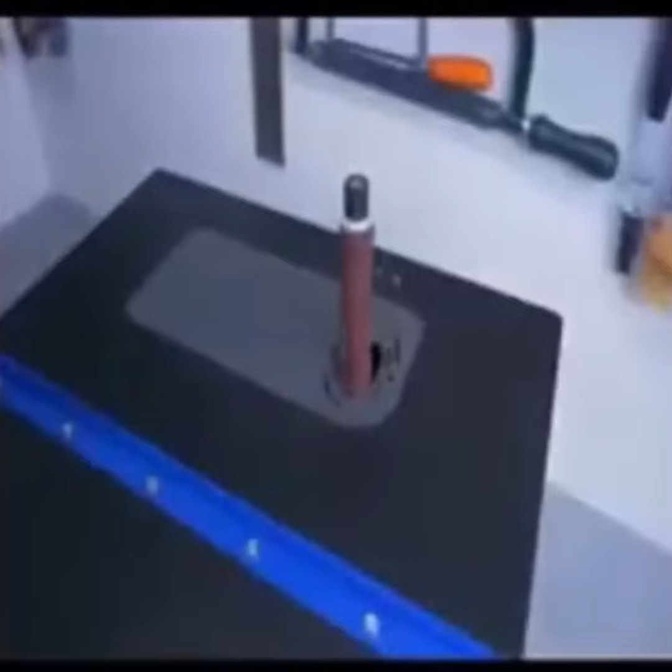And you will never imagine the mechanism going on inside. Let me show you what it can do. Obviously, it's oscillating and can take different sized drums and the belt for sanding inner and outer contours. But what's always been bugging me with these machines is the drums and belts are this tall and most workpieces are not, resulting in only using the lower part of the sanding grit.

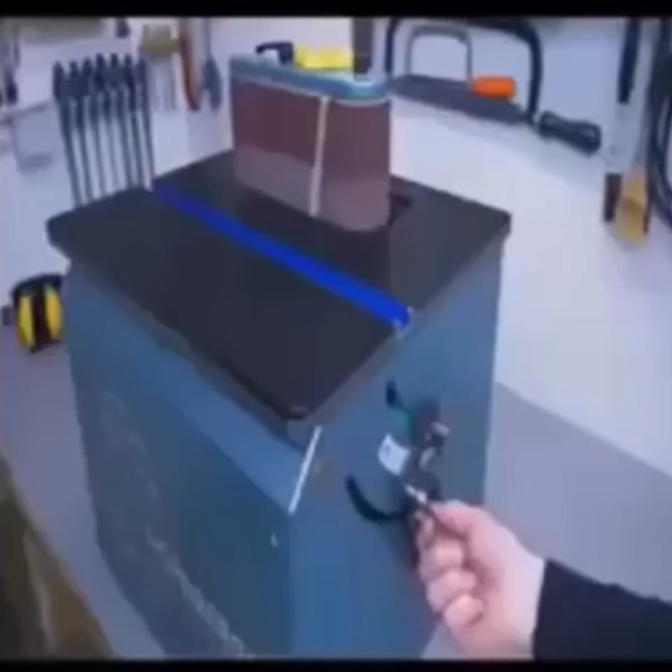Sure, the drums, I can just flip around, but the belt is directional. Flipping it around, you could catch the seam and rip it apart. So a key feature of my sander is a height preset. I can lower the whole mechanism down and use the upper part of the belt. Isn't that fantastic? It also works super smooth. Changing belts is done easily by flipping a lever, and the whole belt attachment comes off with this lever.

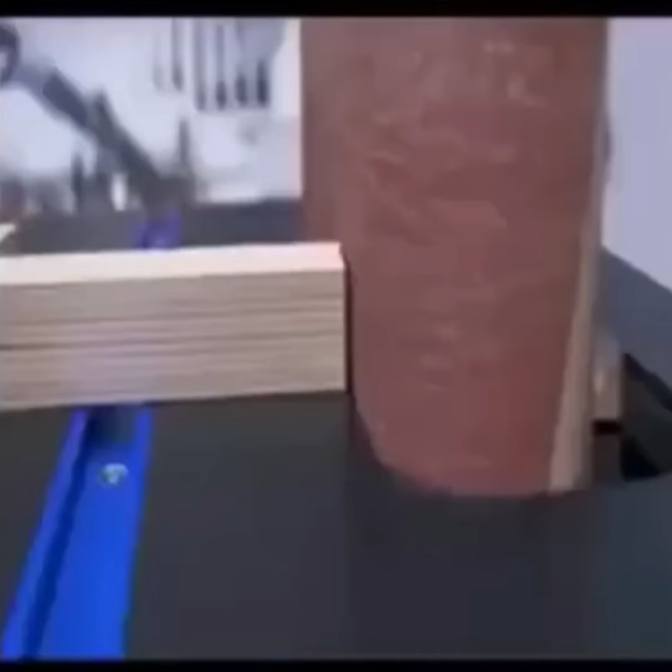Sweet! One feature I decided against is a tilting table. That's just inconvenient. On my machine, the belt tilts. Much more useful. It's effortless with this lever and clamped with a single knob. There's nothing on the other side, everything done from here, but it gets clamped on both sides. I'll show you later how that works. And the big dust collection part is out of the way in the back. That's everything from the outside.

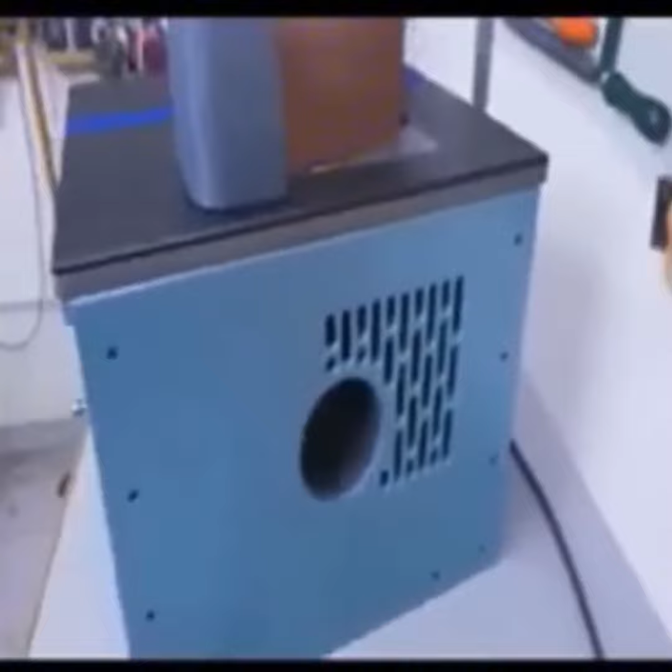You will never believe how I made the oscillation mechanism inside. But first, let me tell you the stupid reason why I built this machine. Not because of the mechanism. A few years ago, I bought this sander with way too many sanding belts now sitting in storage. And I just wanted a better use for them. Really stupid, but that's the truth.

Now, how do you approach such a project from scratch? Where to start? Well, I'll try to summarize. I wrote down a list of requirements with features I wanted the machine to have, like the tilting belt, the height preset, and so on. Then when designing at the computer, I put each feature into its own assembly. So this does the oscillation, this does the tilting, you get the idea. And wherever possible, I try to integrate multiple features into a single assembly.

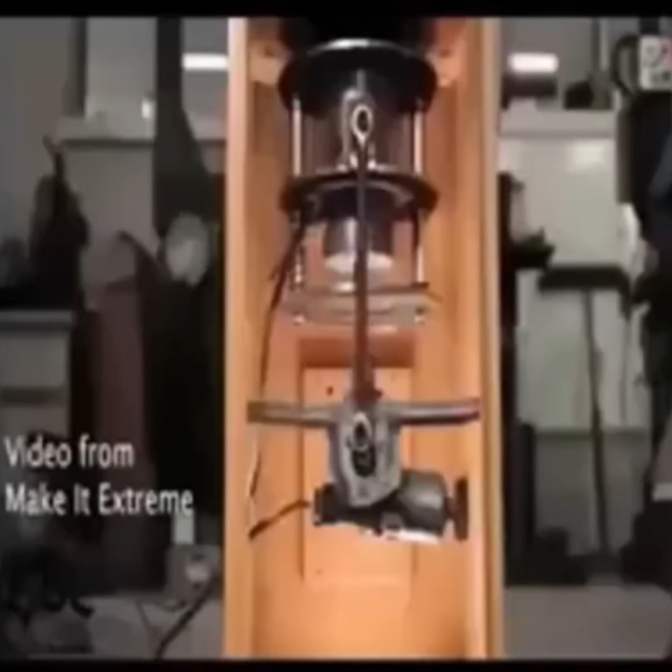Sounds straightforward, but all that was the hardest part. I spent a lot of time designing. But then you can build assembly after assembly and bring them together. So let's get back in time when this didn't exist and begin with the oscillation mechanism. I've got this precision ground shaft which needs to move up and down together with the sanding drum. A common solution is a geared motor with a crank, but to me that's kind of boring.

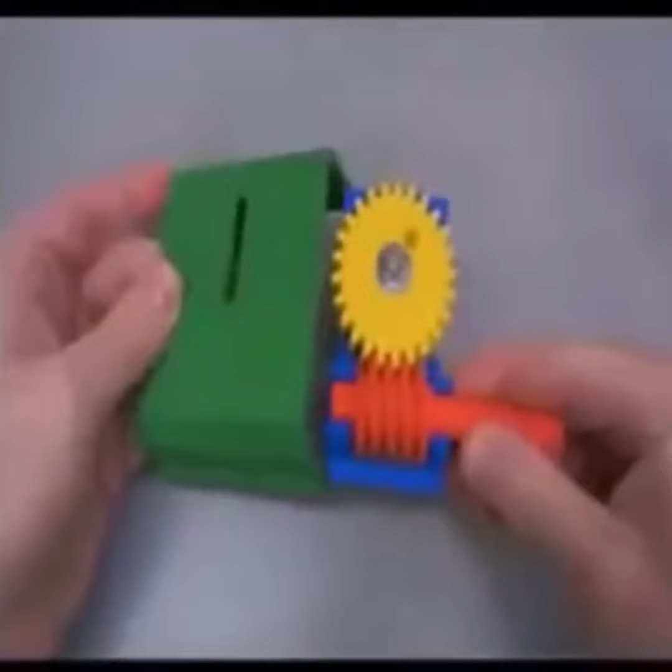I wanted to couple the mechanism mechanically to the spinning shaft with a gear reduction. That should be interesting. From my machine specs, I need a gear reduction of 25:1, and I could do that with a worm gear drive. Every turn, the worm advances the gear by 1 tooth. It has 25 teeth, and I've got the right gear reduction. And then I can slide this into this housing, add a crank pin here, and there's the complete oscillation concept.

It's a great concept with few parts, but 3D printed like this, it can't survive long term. This has to be metal and constantly lubricated, so I would need to find just the right one off the shelf or have it custom manufactured. That's not gonna happen. So another mechanism with a high gear reduction is a cycloidal drive. And if you ask yourself what that is, take a look at my logo. That's a cycloidal drive. Conceptually, it's simple.

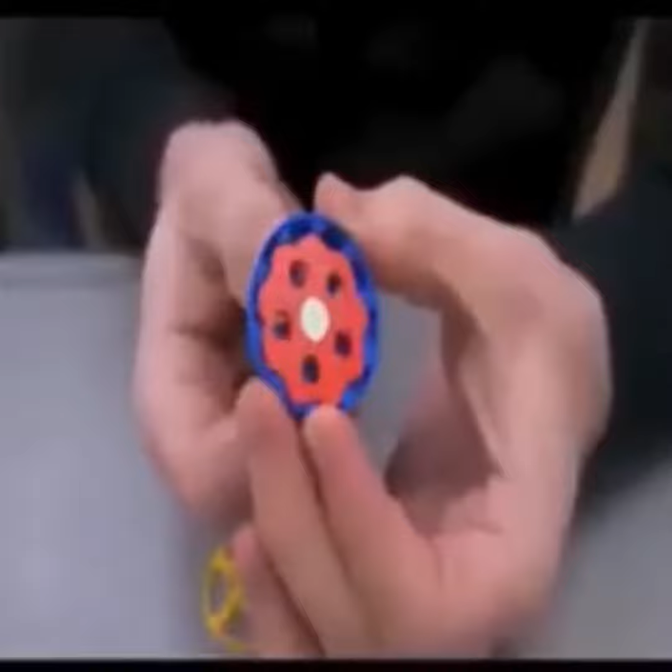We have a housing with pins, the shaft with an eccentric cam, the cycloidal disc, and an output ring. The shaft goes in the housing with the cycloidal disc on top and when I spin it, it does this kind of motion. The output ring fits on top and turns that wobbly motion again into a smooth rotation. The gear reduction is the amount of teeth of the cycloidal disc, so in this case 9:1. This concept I'm sure I can make reliably lasting with simple off-the-shelf parts and 3D prints.

And so now we've got a fast spinning shaft and a slow spinning gearbox, but no oscillation yet. On this concept, the output gear is oriented 90 degrees to the main shaft, making the crank possible. And I still need that for this one. Bevel gears, for example, could do that.

But again, I don't see them lasting a long time. So what else could create oscillating motion? Let's start simple with this ramp shape. If I move this back and forth, you can see the intersection here is moving up and down. And I could pick that up with a bearing.

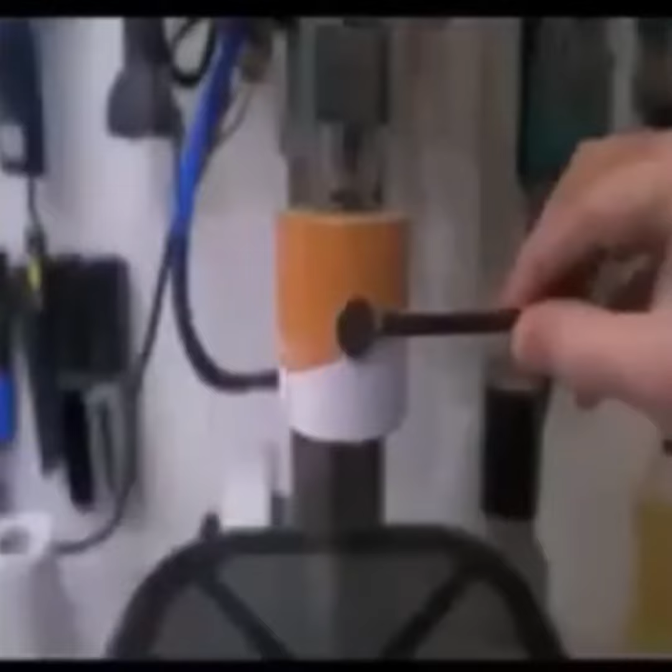Now let's mirror that ramp, and the result is one up and down motion without changing directions, or rather, one full oscillation. But how is this helpful? Well, when I wrap it around a cylinder and make it spin, I now get continuous oscillation. And what actually matters, this cylinder is the same orientation as my gearbox output and a single part. No need for bevel gears. So I think we have quite an elegant solution here and can get serious making the real version.

Getting serious means a lot of 3D CAD work. I modeled the entire assembly with every component before I ordered parts or started printing. But here we go. There are many printed parts, a few bearings, pins and screws, and machine parts, which I need right now, so I cut off pieces from some tubing. The longer bushing goes on first, with a washer and screw as an end stop that I have to play with, of course. Let's put that aside for now.

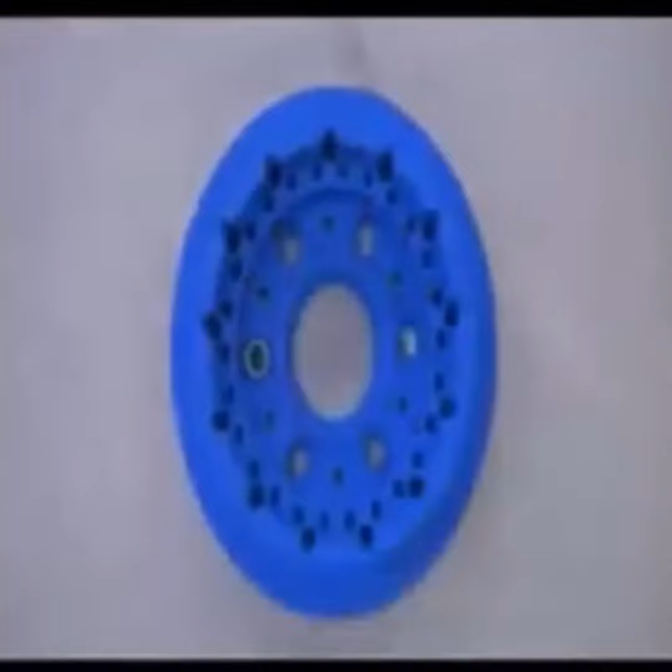Now the gearbox housing. The pins this uses are actual steel pins that fit in these holes that I still need to ream. The automatic compressed air comes in real handy here, removing the chips. The underside then gets a bunch of nuts pressed in, as well as a few on the inside. I could have also used the CNC Kitchen melt-in threaded inserts, but what they don't have is a plastic lock ring, and since I'm expecting vibrations, I wanted that.

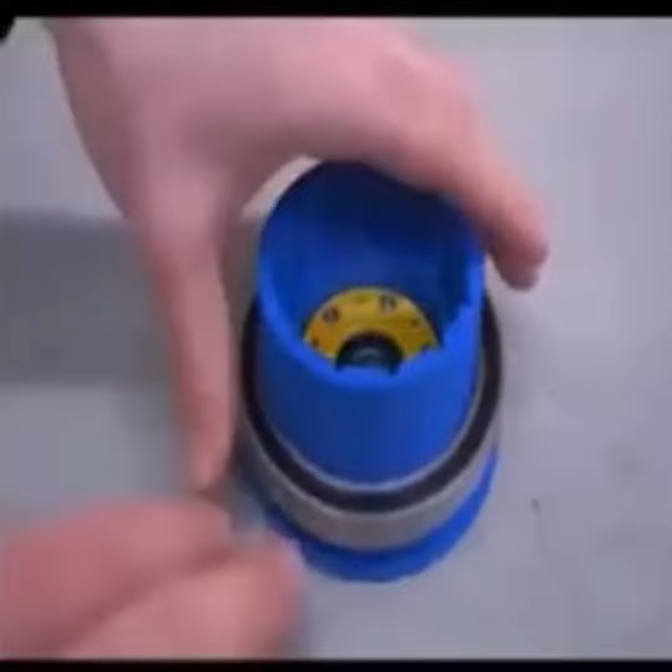This bearing is a light press fit in the center, and this ring goes on top, clamping it down, making this my fixed bearing. The large bearing fits around the housing, where it first slips down easily, and the last little bit is again a light press fit. And then insert all the pins.

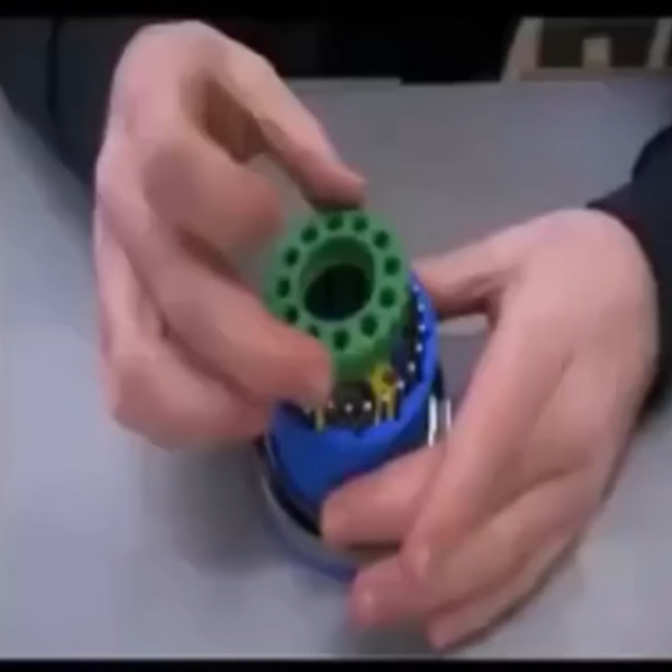Next I need to make sure the cycloidal disc is sized correctly and moves freely in the housing. So when I put it in place, it should just drop down. But it doesn't, and I have to press it down. It does move, but it's pretty tough. I kinda expected this, because I designed and printed this with no air gap, and when that's a real mechanical part, it's basically guaranteed to bind in some way. I need some amount of air gap in here, but just don't know how much exactly, so let's find out.

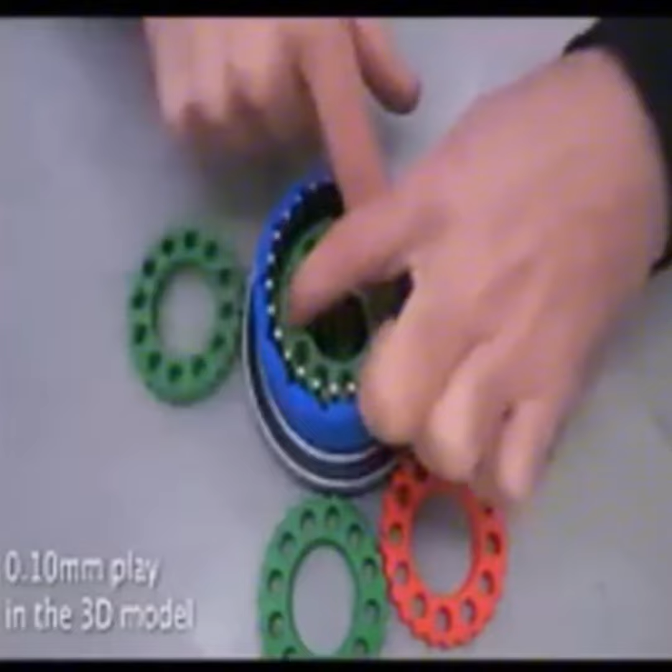I printed 5 discs with increasing play for testing, starting with 0.05. And it already drops down, but the movement is still kind of rough. 0.1. Yeah, that's a bit better, but there's still some places where it feels like it's binding. 0.15. Yeah, now it's getting better. 0.2. Yeah, that's great. And 0.3 is probably no improvement, just more play. Here you can see the play. This is 0.05 and this is 0.3. 0.2 seemed to be the sweet spot.

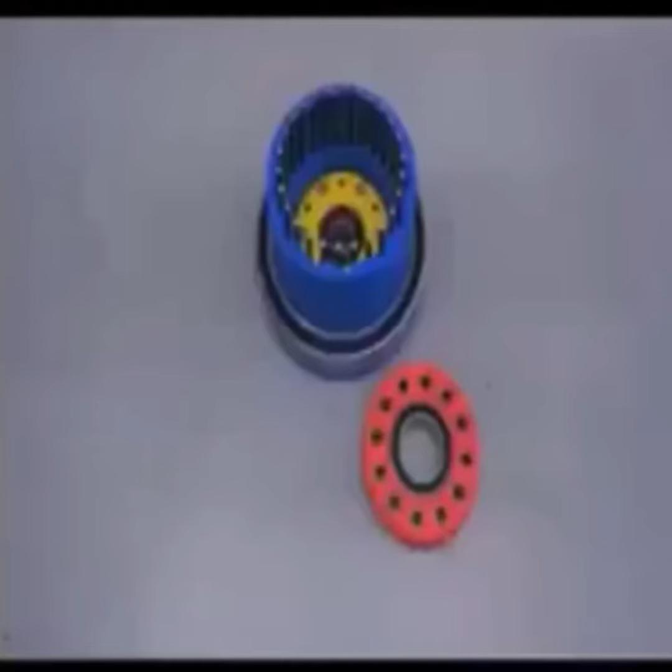Let's go with that. A bearing gets pressed in, followed by steel bushings in all the holes, which came in an interesting packaging. And then a second one. But before the discs came another ring first. It has some holes to ream, nuts to press in, a center bearing, and then the output pins, because this is part of the gearbox output and it sits below the cycloidal discs.

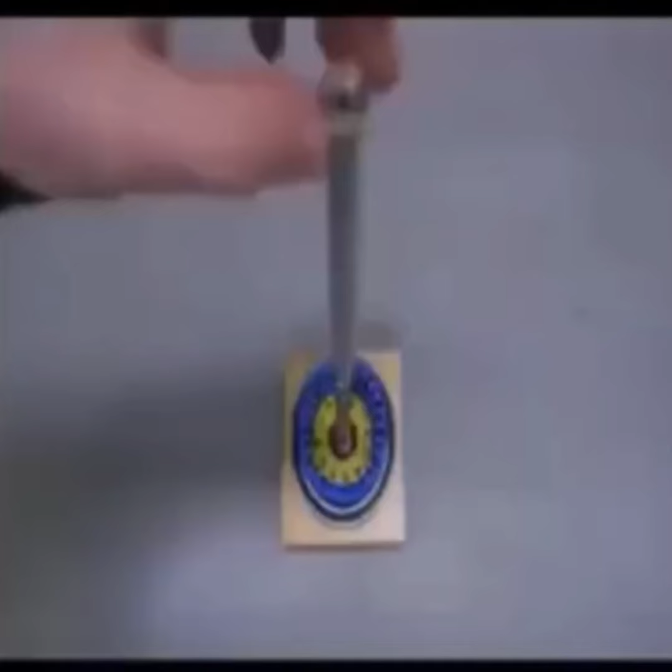Now the parts can come together on the shaft. First the housing, then one of the spacers, and the output ring. Next come the eccentric bushings that create the wobbly motion. Their center hole needs to be reamed as well. They have a feature in them which positions them opposite to each other like so. To fasten them on the shaft, there's a pocket for a little square nut and a tiny set screw.

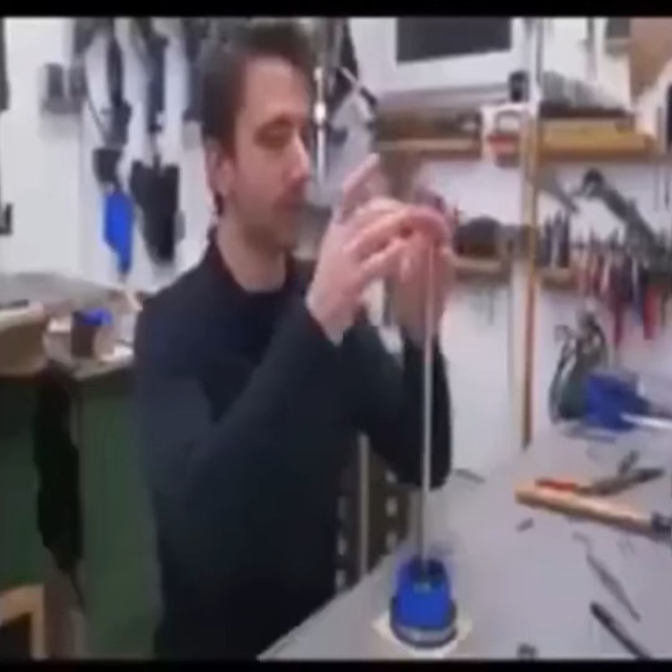And now the disc. Wait. Ah, crap. I forgot to file flats on the shaft. And disassembly is not as straightforward. Yeah, at least I didn't forget to mark where to put the flats now. Since the steel is hardened, I'm using a diamond file and it bites into the material well. But there has to be a more accurate way of doing this.

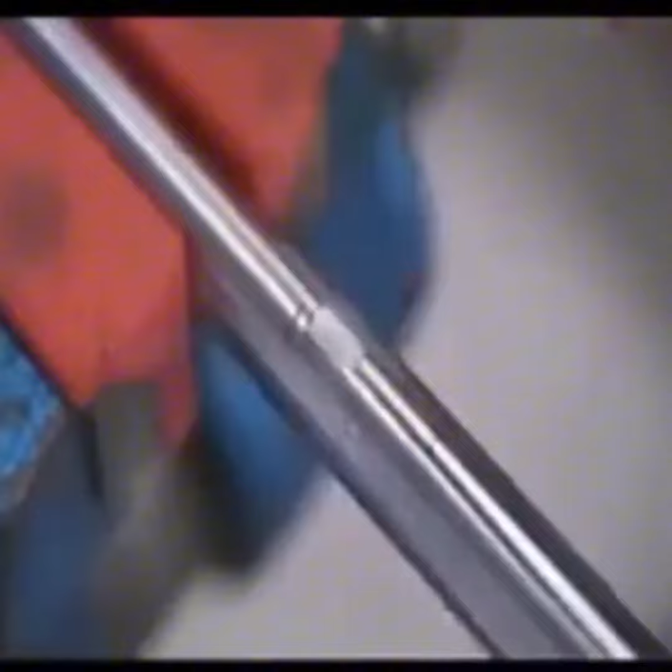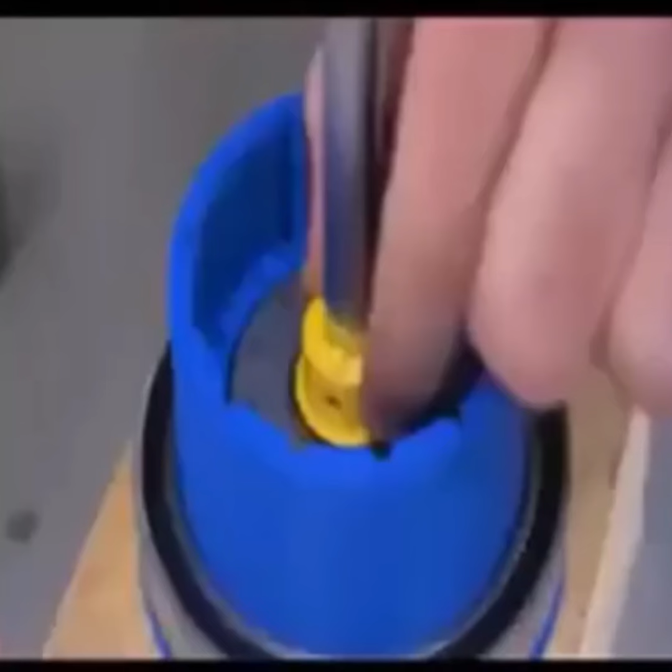I put 2 square blocks at the ends and this piece which holds the file parallel and at the right height. No need worrying about steady hands. But the real benefit is the second side, because I just need to flip the shaft and the second flat will be at a perfect 180 degrees to the first. Simple technique, but great results. The other flats are for later. Now I'm much more confident in the set screw and the cycloidal disc can go on top. I was really keen on testing, so let's do it.

This looks nice. So now the second disc. I need 2 discs because having only one wobbling around would vibrate. So having a second one opposite to the first one, the vibrations will cancel each other out. But I have to make sure the second disc is oriented correctly to the first one in the housing. Otherwise, these output holes won't line up with each other.

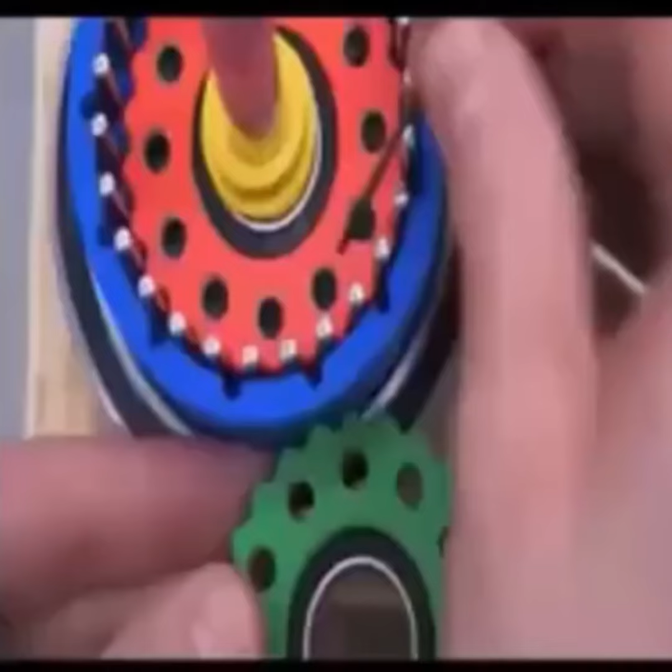Since I have 12 output holes and 25 teeth, this is not symmetrical and there's only one correct position. So I put a little notch at one of the holes to make this simple. Right here. Looking straight down, you can now see how the holes of both discs kind of do a circular motion around where the output pins will be. So let's put them in.

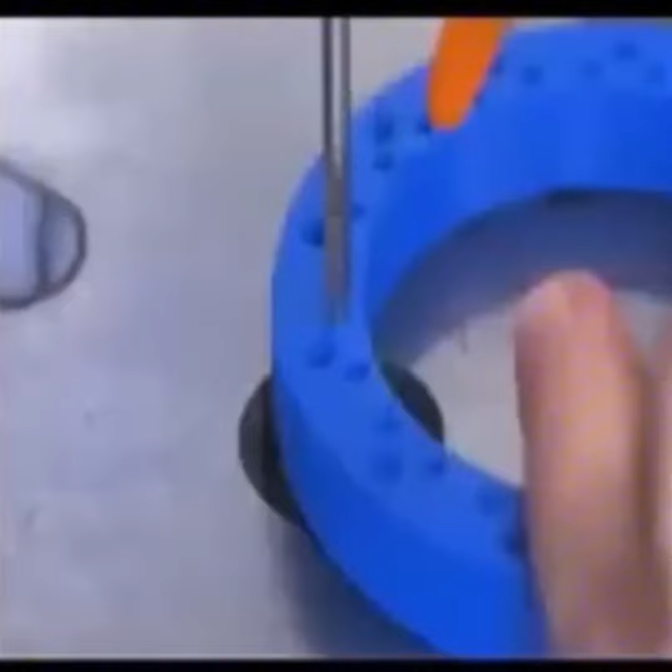That looks promising. The remaining 3 holes are for screws. And after reaming the pinholes in the lid, it goes on. On top now goes the actual gearbox output with matching holes, and on the outside there is the integrated ramp, which I made a lot smoother, and it also fits a bearing. As usual by now, reaming the holes and pressing in a bearing, then the last spacer washer, and then assembling all the parts together.

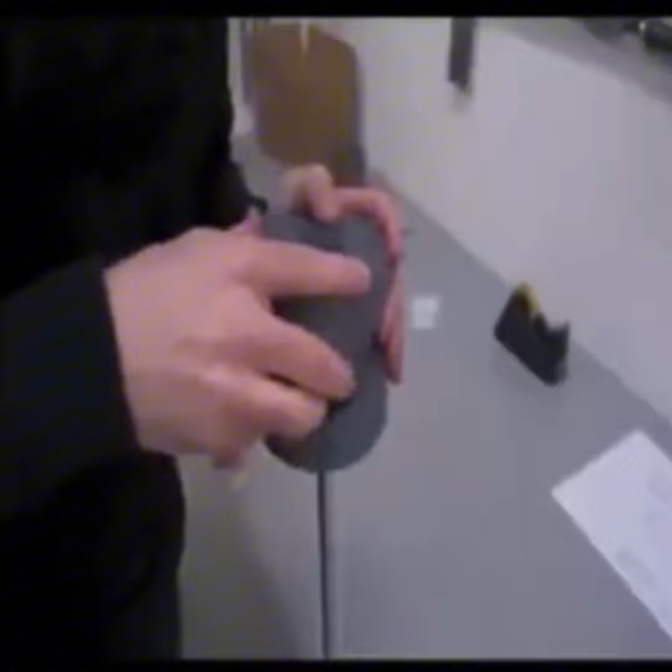The screws hold everything together, but I have to tighten them by feeling, and this is my by feeling face. Without context, this looks really stupid. And finally, a dust cover with an improvised labyrinth seal. Oh yeah, that's the gearbox done. What a nice little compact unit, basically fully enclosed and protected from dust, which is nice. It's super smooth. I can't really feel resistance other than the 6 fresh bearings.

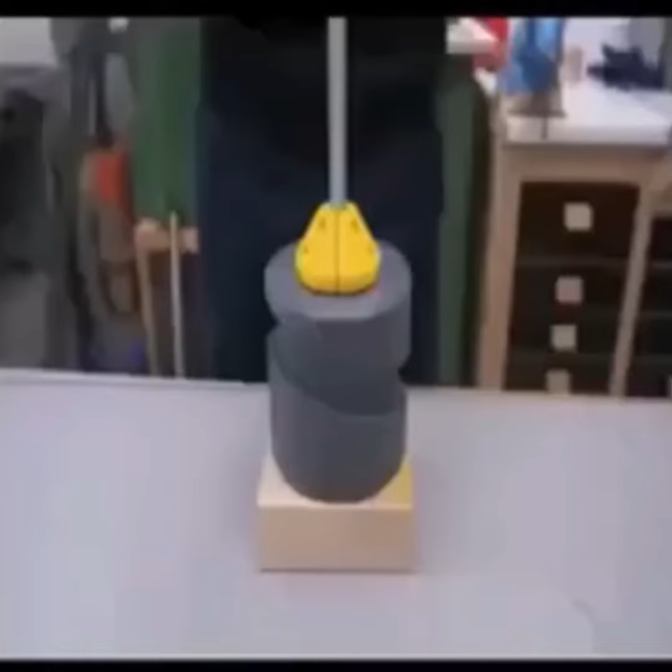And what you might not expect is this is back drivable, which means it works when I spin it here or here. That's cool. Just too bad you can't really see the inside now working. Let's fix that. There you go. I cut it open. Let's see it in action.

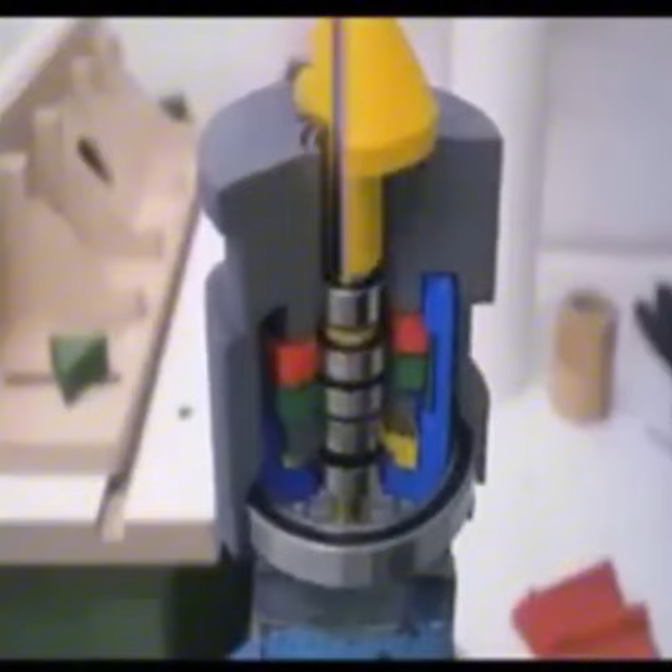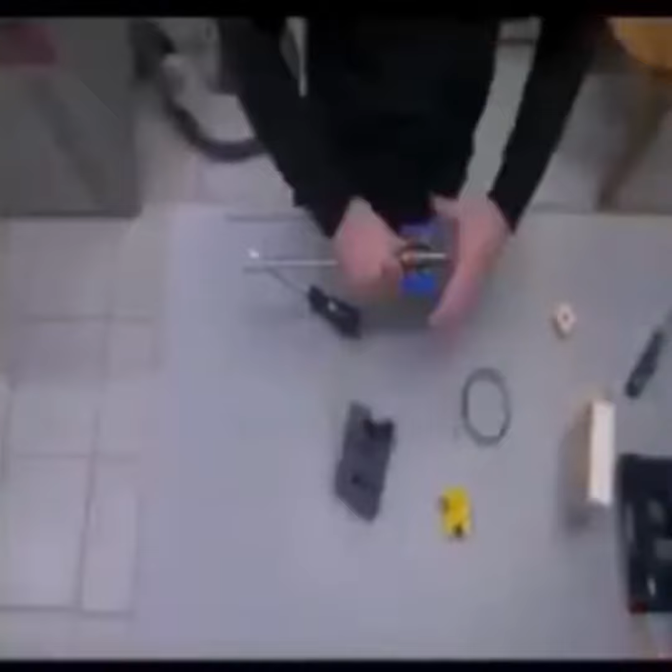So for this short sequence, I had to disassemble everything again, but this then at least allowed me to add grease when reassembling. But still, can this survive long term? Because it will run a lot. Well, I'm confident because all the motion is either done by bearings, metal on metal, or at least well-lubricated plastic on metal contact. And even if that's still not enough, I've got one more trick up my sleeve.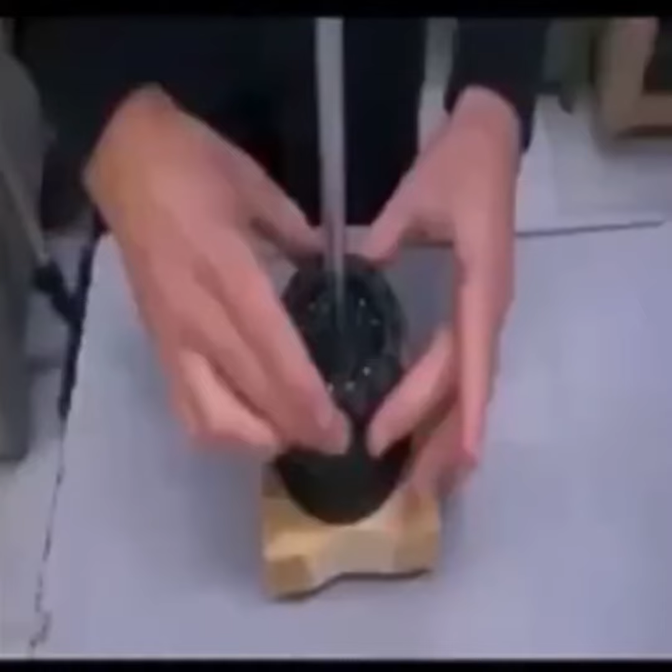But for now, let's disassemble it again, because until the final assembly, I want to stick with my parts, because I of course want to see if they work. The next part that goes on the shaft is the pulley. It's made from the pulley and the pulley support and starts out as this chunk of aluminum.

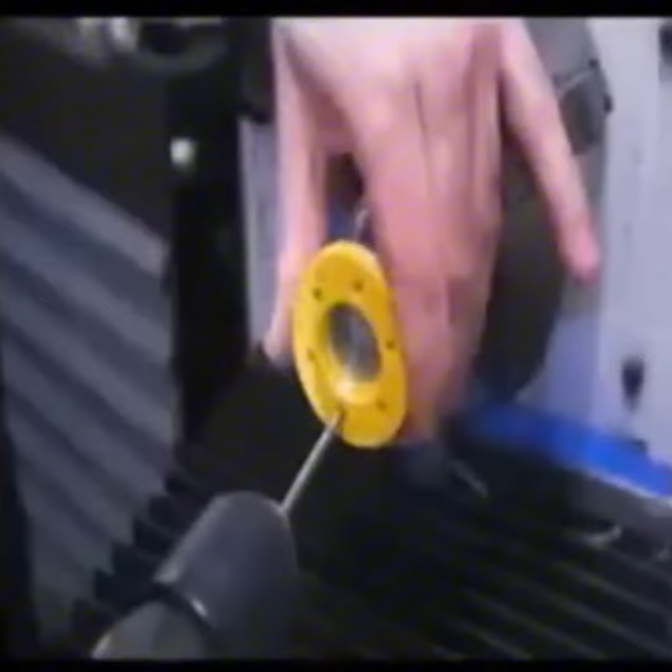This first gets a facing cut and then turned to size with a few roughing and finishing passes and a chamfer. It's a non-critical dimension, but still nice when you hit the 45mm exactly. I used a 3D printed template for transferring the hole locations and then cut the piece off, but forgot to record. It could have looked like this. Except the diameter is too large for my tools, so the last bit is for the hacksaw.

A quick jaw swap to clean up the second face, and then heading to the drill press for the threaded holes. Spot drilling, chamfering, and threading. Standard procedure. For the set screw hole, I installed 2 screws that position the piece correctly in the vise, and with the ruler method, I made sure the part is centered. Then I carefully spot face with an end mill and do the rest. For now, this piece is done.

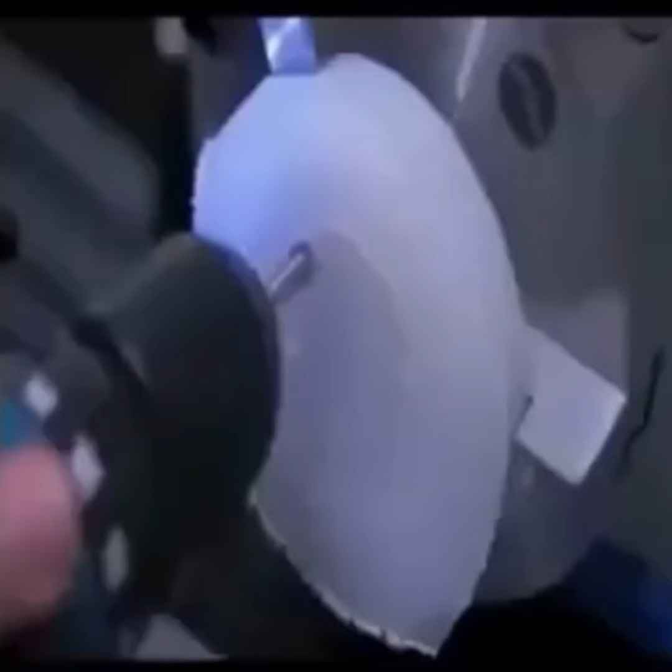The pulley starts as a scrap of polyethylene sheet, which I placed on the CNC router to cut the screw holes and a slightly oversized circle. Cut out, it goes in the chuck where I marked the rough size of a pocket, which I turned to a snug fit with the pulley support, followed by chamfers and removing this material, which creates very fluffy shavings.

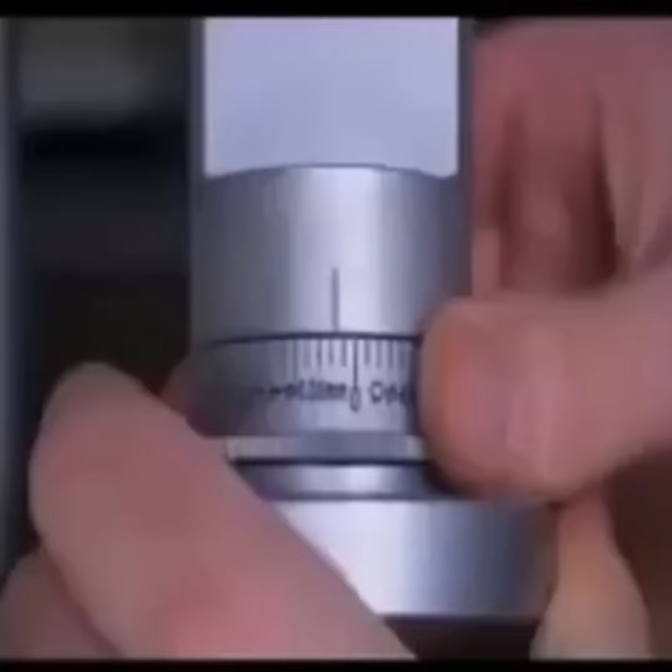Then the pulley support goes back in the chuck where I faced it one more time and then screwed on the pulley with a dab of Loctite on the bolts. I turned the diameter to size and sharpied it black to better see what comes next. Finding the edge with the tool, move it to the center, scratch the surface and zero the dial. Then plunging to a certain depth, creating the V grooves for the belt and breaking the sharp edges.

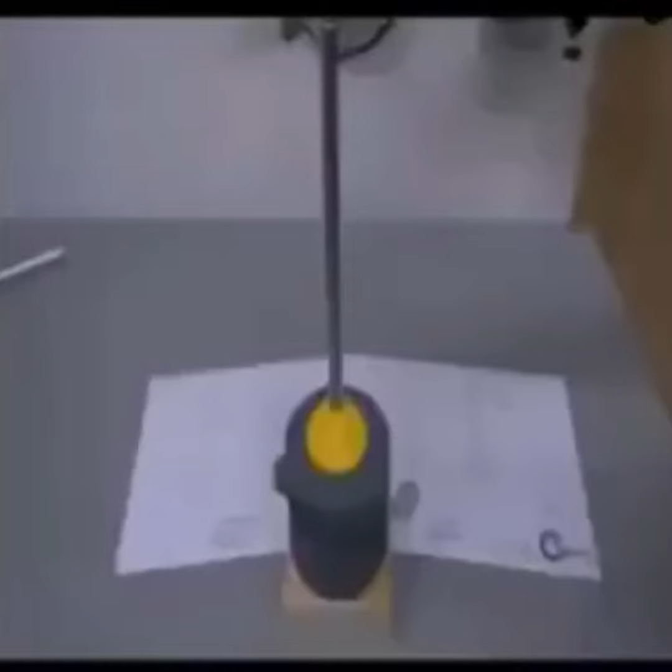The last feature is a precise center hole, which I drilled and then carefully turned to size. It took many passes, but I hit my target and the result is this. Ah, perfect.

Alright, next comes the upper bearing block. The upper bearing sees more of the load when I'm pushing against the sanding drum, so I made the bearing housing from aluminum. Here I marked the side centers, which helped me to position the piece at the correct location on the machine bed. There, I first machined the holes that align with my hole grid, so I can use 2 bolts to hold it down, and then I let the machine go to work. The finishing pass is really satisfying, as well as the chamfer.

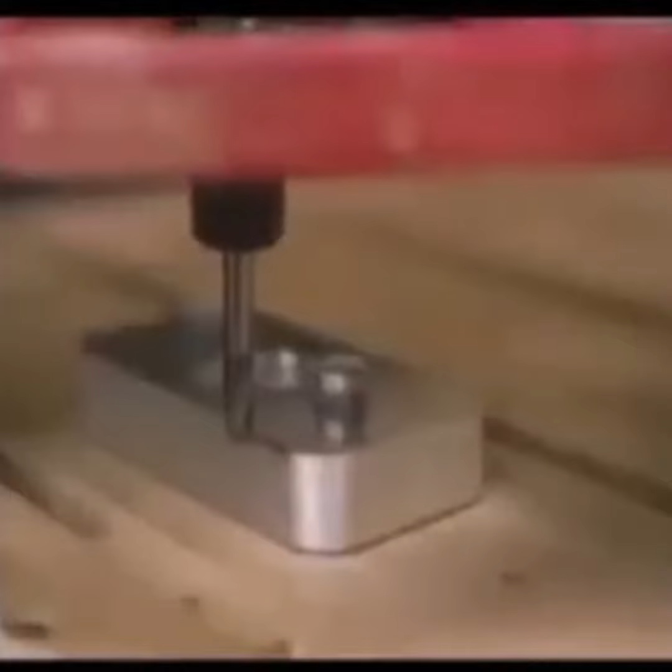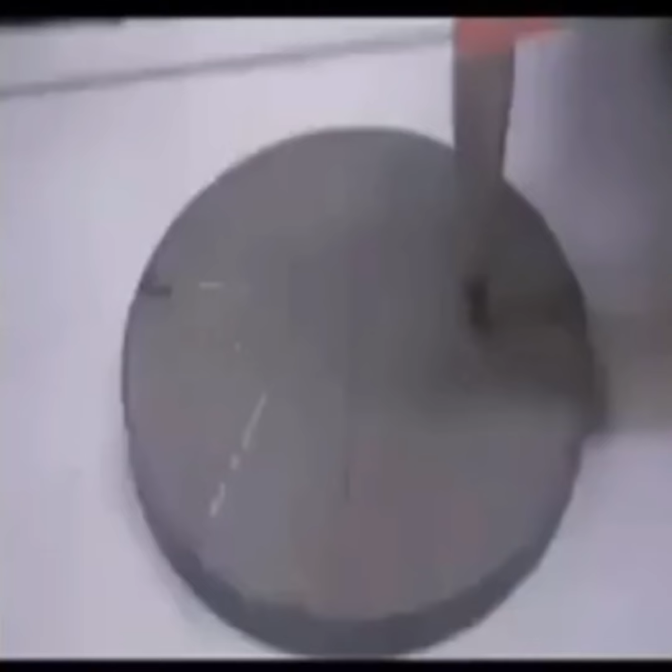Turned out really well, but right now the bearing doesn't fit, because the CNC is not accurate enough for a bearing seat. And I want to turn that, so somehow I need to hold it on the lathe. I've got some round offcuts from a laser that should work. I marked the center and the hole spacing of the 2 hold-down holes, which I then quickly turned into threads. With a magnet on each jaw, the plate has just a little bit of stick out.

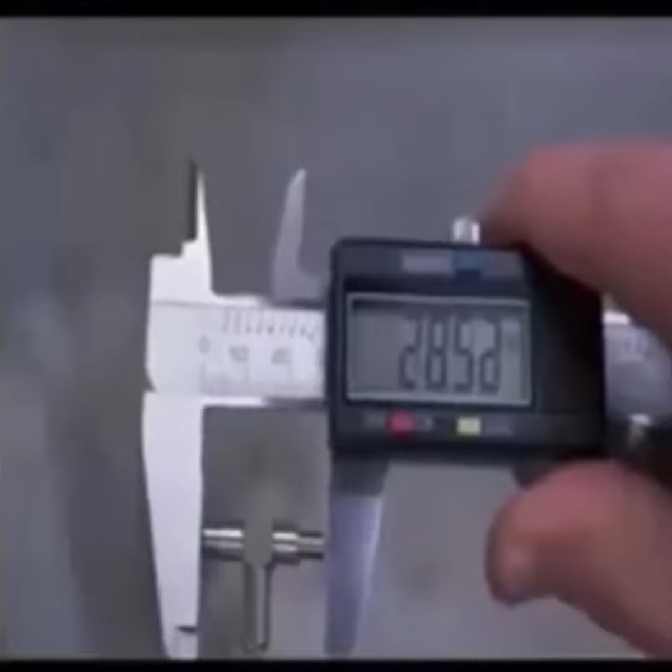I face it by leaving some material at the center, and after about 1mm, I turn it to a nice fit with the aluminum. That puts it in the perfect center and I can hold it again with bolts. I left myself about 1mm of material so I can do multiple passes and get it accurate. And I think that paid off. The result is spot on. Then turning the hole to final depth.

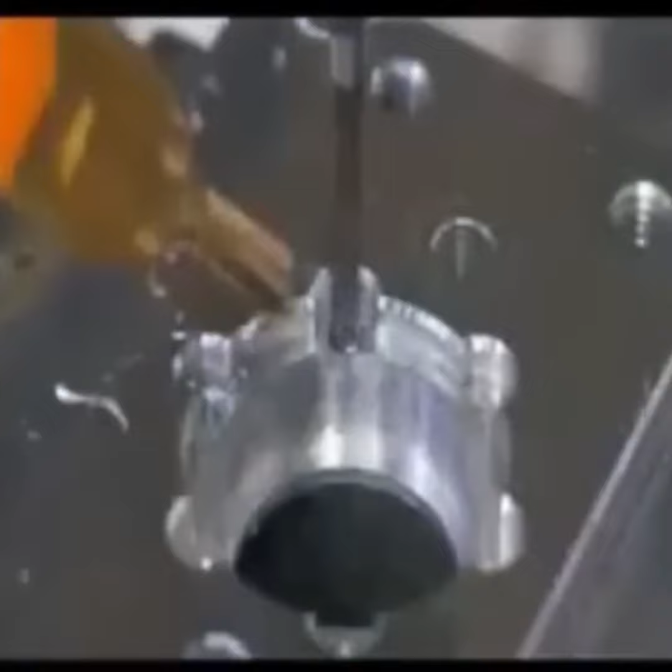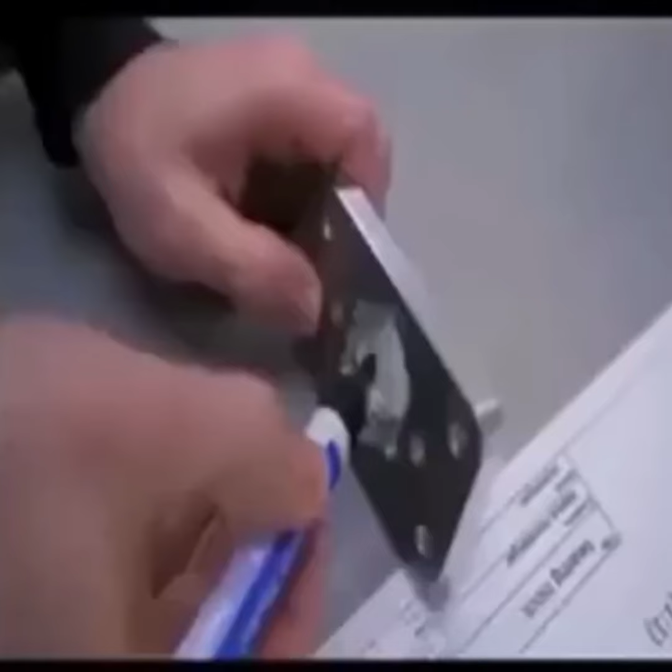At the drill press, I drilled and tapped the outer holes to M6 and the inner holes to M3. But since they are blind holes, I finished the threads with a drill and a low clutch setting. The bearing nose should be a light press fit. And it's not. Oh, fuck. Turns out the bearing is also slightly undersized, which I should have measured before. But at least I can now try out a trick my dad told me. A layer of Sharpie. It's a few microns thick and should solve the problem. Oh yeah. That's a press fit now. Nice. And the 6 screws hold it in place.

The last part that goes on the shaft is the drive block thingy that engages with the sanding drums. It's straightforward and similar to the pulley support. I face and turn some stock to size so it again fits the template, chamfer it and cut it off. This time with recording it. Flipped around, I face it to length and then drilled and turned the hole to the same fit as the pulley.

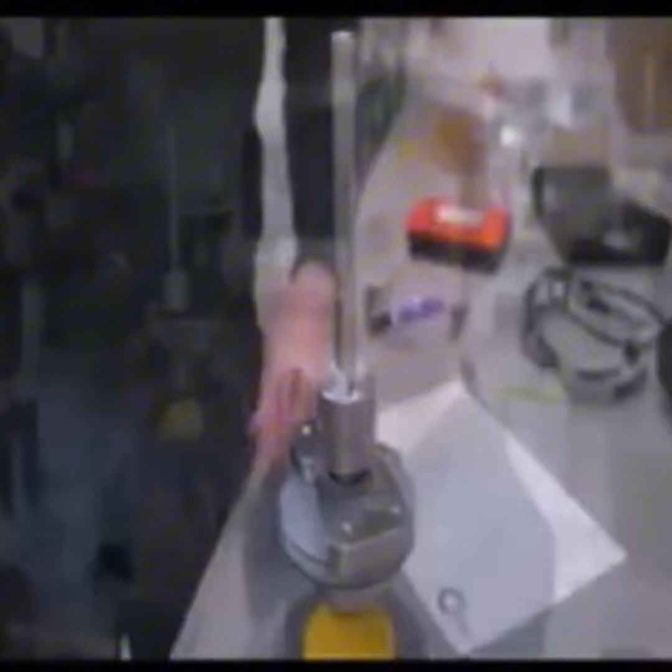Then transferring the hole positions, drill and ream them to size and depth, and hammer in some pins, which will engage with the sanding drums. They also line the part in the vise for the M6 set screw hole. Very nice. Everything is mounted, but it's far from being a finished sander.

This needs to be mounted in something, and I call that the sled. The sled basically is a wooden box where all parts have different features cut into them, and after a bunch of toolpath programming and flattening the CNC bed, I can begin.

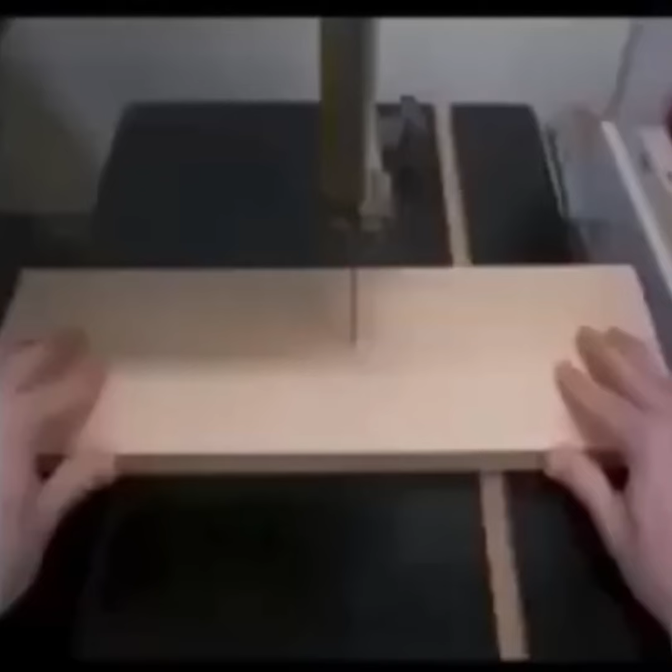The workhorses are these single flute bits in different diameters. They allow me to take aggressive cuts and remove a lot of material. But first I have to prepare my material. Some 18mm thick birch plywood, which I cut into roughly oversized pieces, and then cut a shallow groove all around for my hold-down clamps. This gives me access to the whole surface for machining.

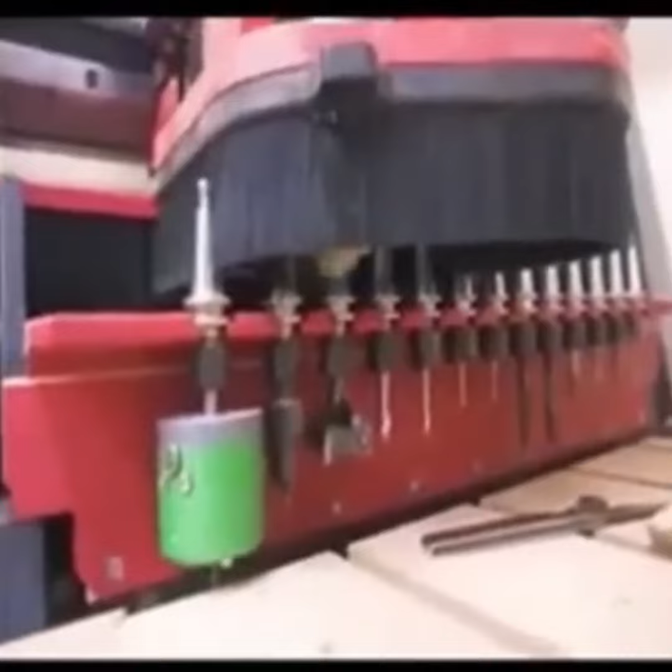But mostly the stock material isn't flat to begin with, so I shim the gaps to not bend it with the clamps. I then cut the various holes and other features into the part, followed by the outer contour to about half the depth. Then I switch to the flattening bit to make the surface flat and also cut away all the burrs from previous operations. And then the program waits for me to switch to screws to finish the outer contour.

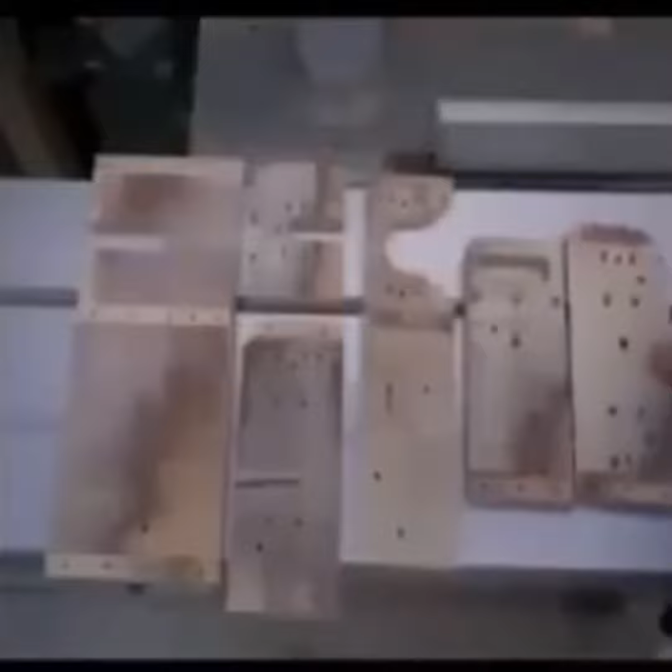And like this, I cut all the parts. Some I also just tapped. And of course, I also had to crash into the shim, destroying this brand new bit. At least I can continue, so I removed all the bigger chunks, flush trimmed the edges, and made new grooves for the second side. I then used pins to precisely position the parts for the second side. That works because I have the same hole layout in Fusion 360, so the software position and the real position match, and I don't even have to probe the parts.

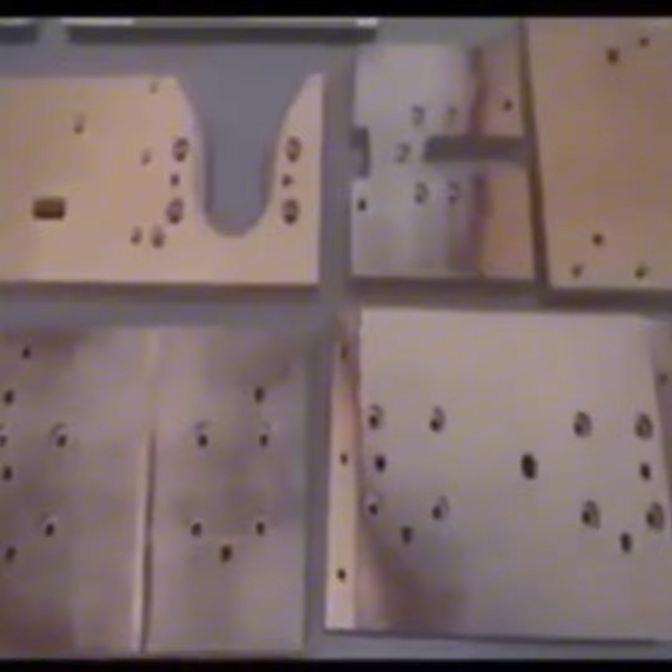Most of the second side operations are holes, chamfers and big chamfers, and flattening to thickness. Basically the same for every part. And there are all of them finished. And none of these parts are sanded, but by using the right techniques and especially order of operations, I get these clean and sharp edges everywhere on both sides. Let's check the fit. Ah, beautiful.

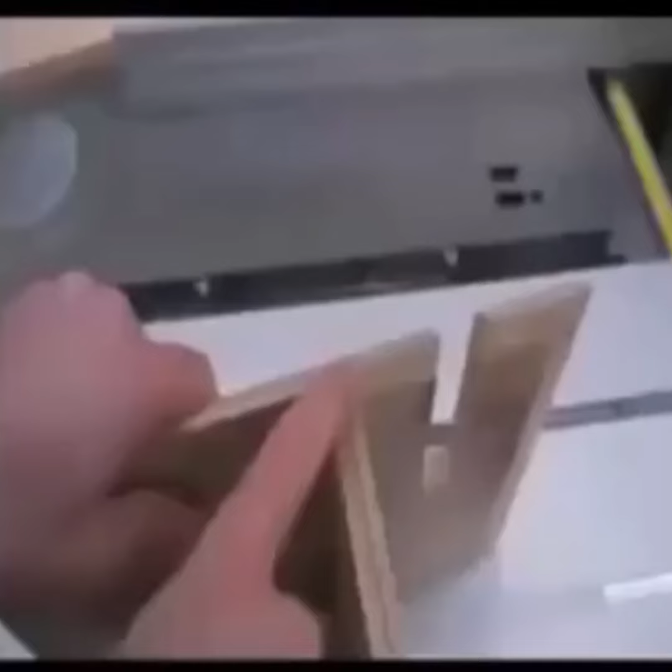Before assembly, I inserted a few nuts and some steel pieces that I first needed to make. Straightforward. They will be used later. I'll do the assembly here on the table saw, because I know this is a flat surface, starting with the back and middle piece. The bottom edge needs to be flush, and then I can transfer the holes. All these screw joints got a clearance hole using the existing holes as a guide, then a pilot hole, and then a screw. That way the drill bit doesn't wander in the plywood edge.

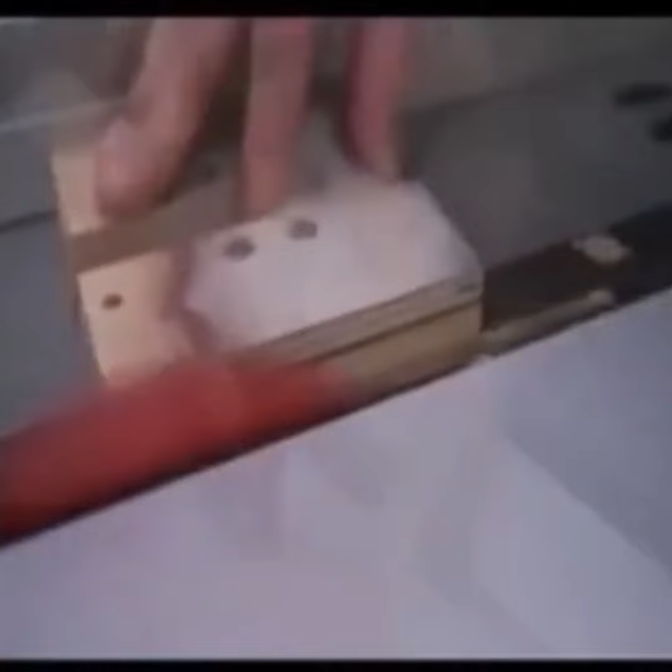Then the top plate flush with this edge, the left and right side. But they needed to be clamped in position. Lastly, this bottom piece, but it seems to be just a hair too wide. So that's the sled skeleton almost complete, and because of the way I designed this, all the pieces are kind of squaring up each other, making this a square block all around. With it all together, I could remove a few screws again and replace them with the dowels to make it a more permanent connection.

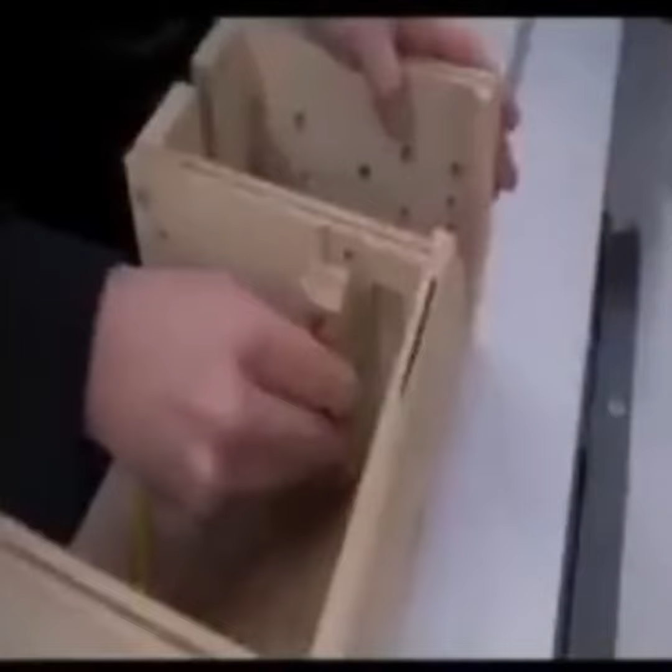Next came two pieces for the motor mount, except they didn't require the CNC router, and then they got bolted on with the nuts I previously installed. Then I made these angled pieces that close the gaps between the top and back plate and glued them in place. With the glue dry, I flush trimmed all the dowels and then cut a large bevel, which is for clearance when tilting. That's the finished sled frame. Let's add components to it.

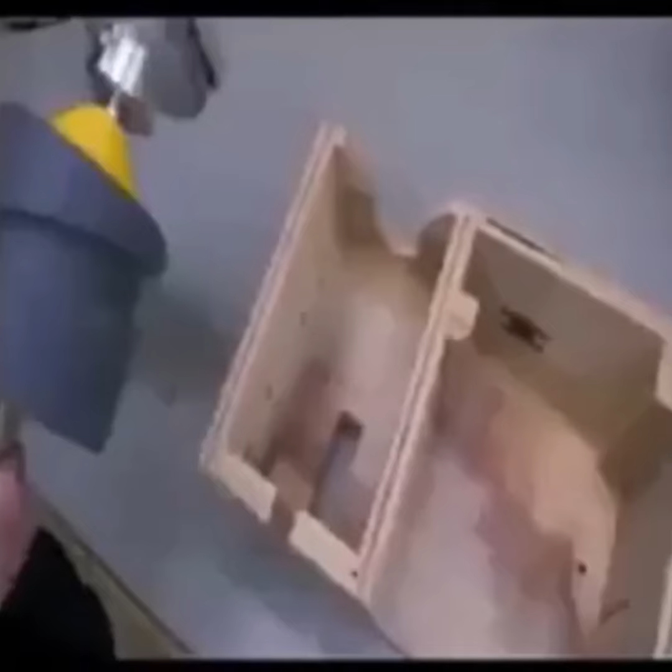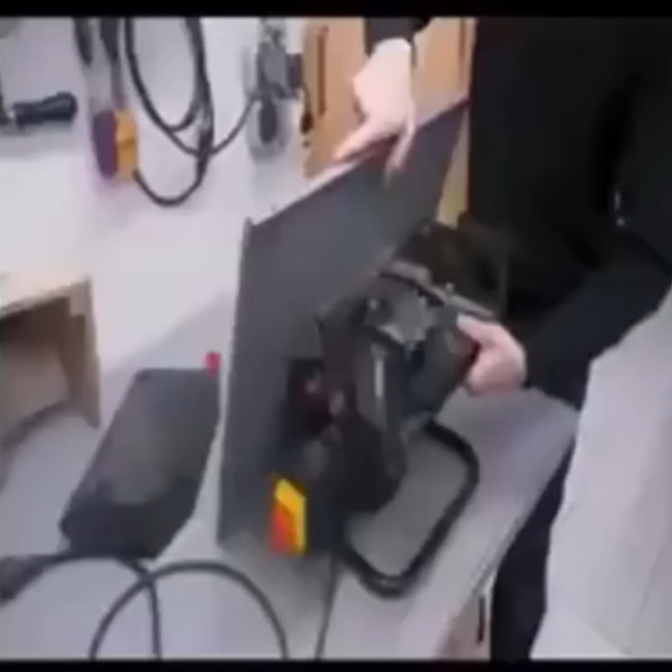The gearbox with belt goes in here, where the housing gets bolted to the bottom, the bearing block to the top, and the motor goes here. Yeah, what motor? I've prepared something for that. I picked up this crappy little table saw for free from the garbage, where it belongs. I mean, I'm terrified of this as a table saw, but it has a nice little motor. I just need to free it from all this terribly dangerous table saw crap.

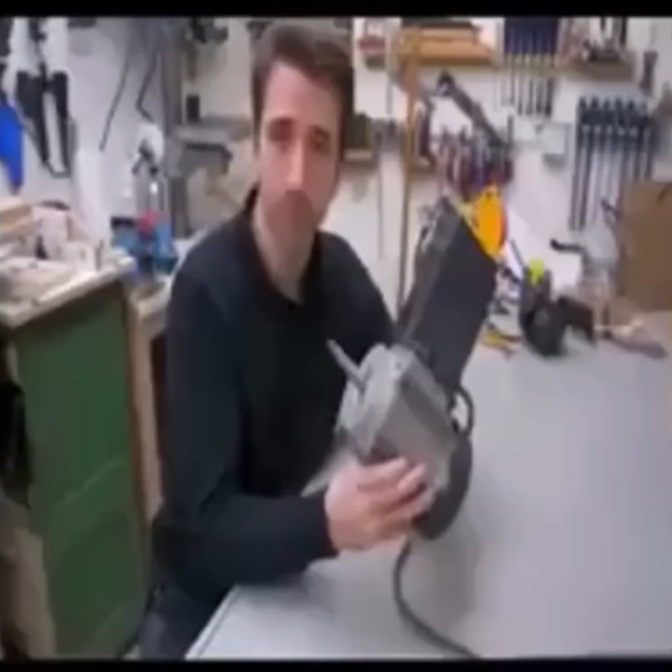And there it is, freed from the pile of scrap metal. Nice and quiet, 700 watts and 2800 RPM. That's great. The capacitor and wiring I'll mount elsewhere, so the motor really is as compact as possible. Something strange though is this. A significant rubbing noise coming from the back.

So I took off the back cover and couldn't believe it. There are two pieces on the fan that are intentionally rubbing on the housing. Why? Was this supposed to be a motor brake for the table saw? I don't know. Let me know what you think in the comments, but this will go.

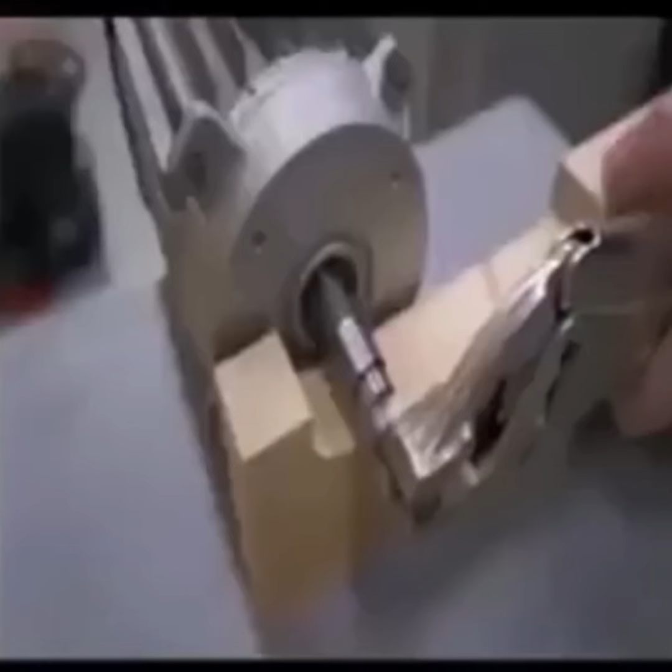Even spring-loaded. Now right here on the shaft needs to be a flat spot for the pulley set screw. I could hold the shaft in place with vice grips and use a similar file contraption as before. Only this time the shaft isn't hardened, so I could use a normal file. The rest of the shaft is too long and I also don't need it, so off it comes. I then let it spin to clean the end and chamfer it before I started working on the motor mounting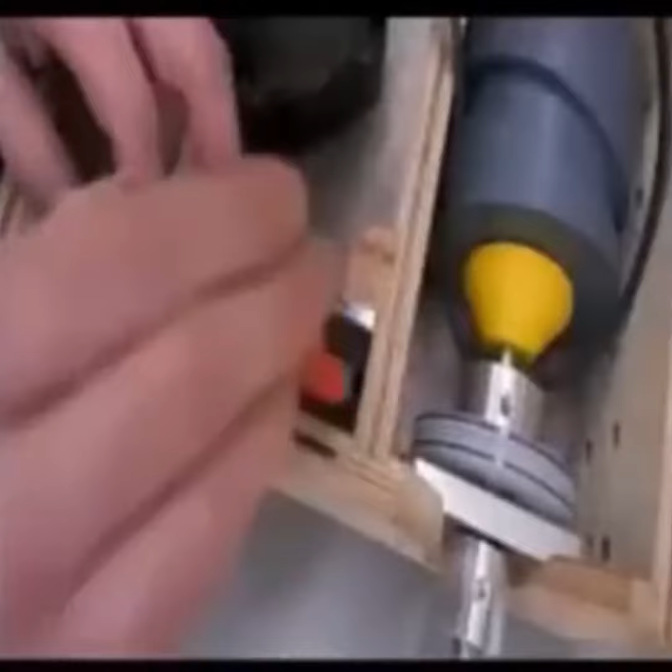Then I transferred hole positions again, drilled pilot holes and added screws. I couldn't reach the top screws, not even with a driver bit in pliers, so I opened up these holes and used hex head screws. Now that's a solid mount to bolt the motor to.

Well, I've got a problem. I cannot get these back screws installed. There's just so little space, and I knew this would be difficult. I can get them in place, but then just can't get the thread started and the screw jumps around. And the pulley isn't even installed yet. I don't want to drill access holes in the top because I wanted that closed off.

Yeah, but I have an idea that might work. With a threaded piece, I can hold the bolts in the lathe chuck and work on the threads. I had to shorten them a bit and then remove the threads of the first couple millimeters. So now the screw can fit in the hole and stays in place, making it much simpler getting the thread started. Then I also realized I could remove the front support for more access. Nice. And the threads are in.

Alright, now I know how I can mount the motor and can continue with making the pulley. It's relatively simple and starts from this piece of aluminum from before. First facing, turning the major outer diameter and the step to size. Then I again mark the surface to easier locate the edge and the starting depth, and then turned the 3 slots just like before. Here I also broke the sharp edges with a file.

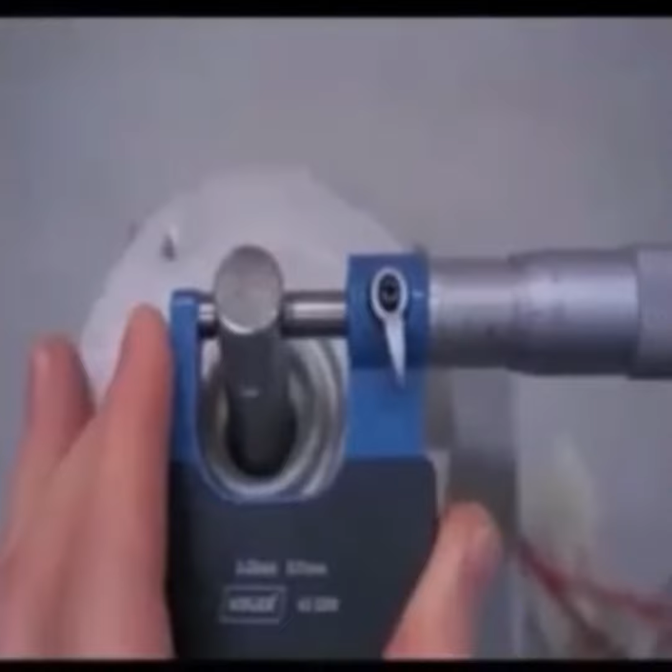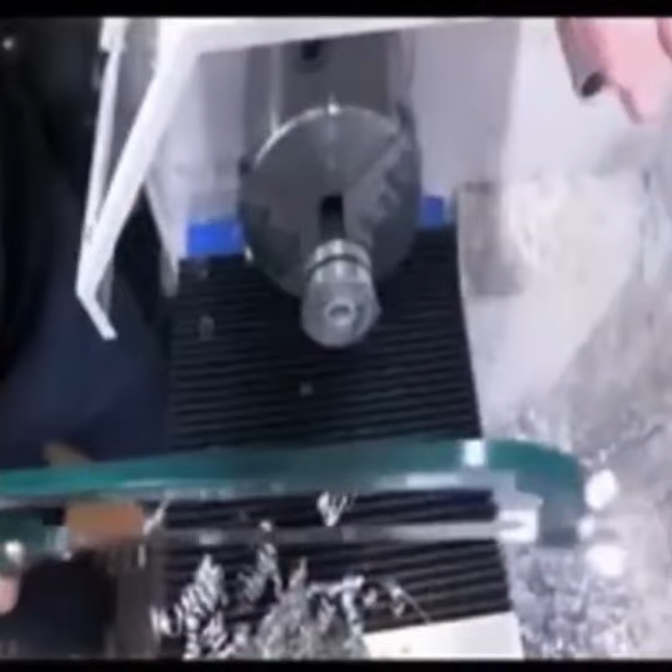And lastly comes the hole. I first removed most of the material with a drill bit, then measured the actual motor shaft and turned the matching bore. Checking with the motor, and that's good. Flipped around, I could part off the rest, or at least that was the plan. Luckily, only cosmetic damage and I could continue. Everything left is facing to length, turning the second step, deburring the hole, and making the threaded hole for the set screw.

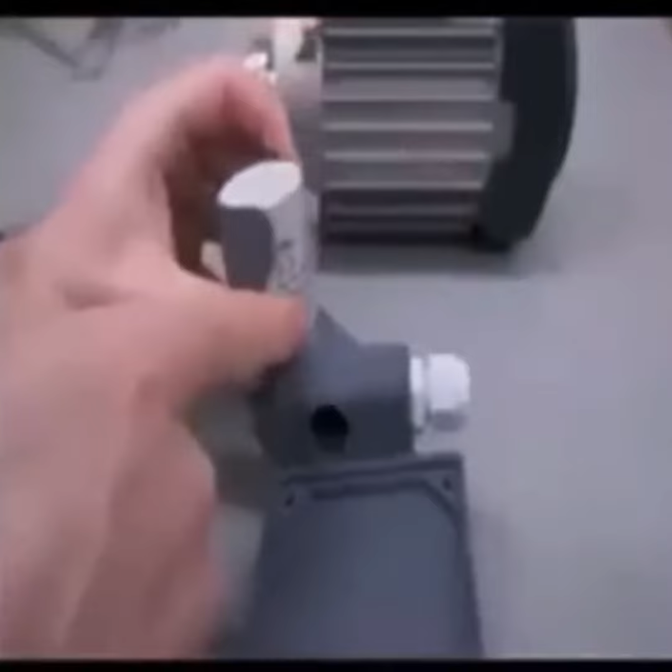For the wiring, I 3D printed this custom lid. It fits one of these cable clamps. The capacitor has its place here, with the wiring going internal through this hole. And when it's assembled, the hole will line up with this one that I need to open up. Not only that, but also cutting through the top. Then I finished up the wiring, gave it a test spin, and closed the lid. That turned out nice.

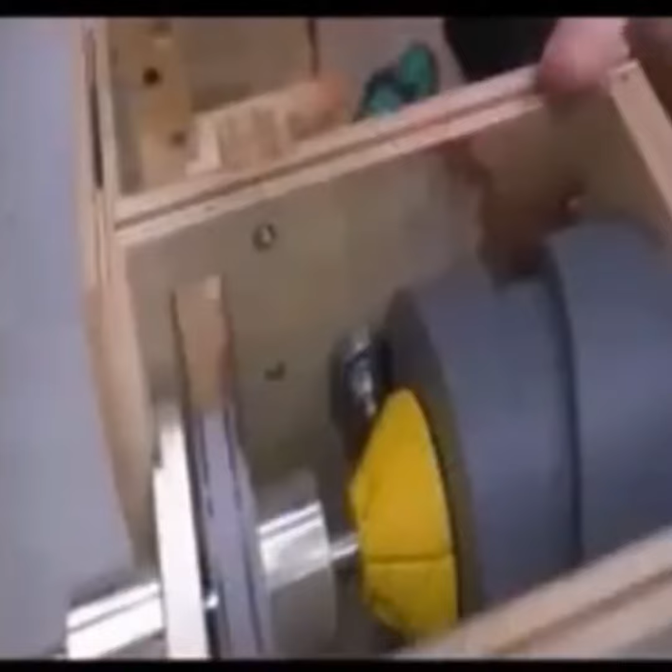Another addition before testing the gearbox with the motor are 2 bearings on top of the gearbox output. They are the axial support and will take load away from the other gearbox bearings. But having just plain bearings on top didn't work so well and was wearing the surface quickly, so I printed these cover parts from TPU, turned and chamfered them, and pressed the bearings into them, like wheels. That's better. And back to the motor.

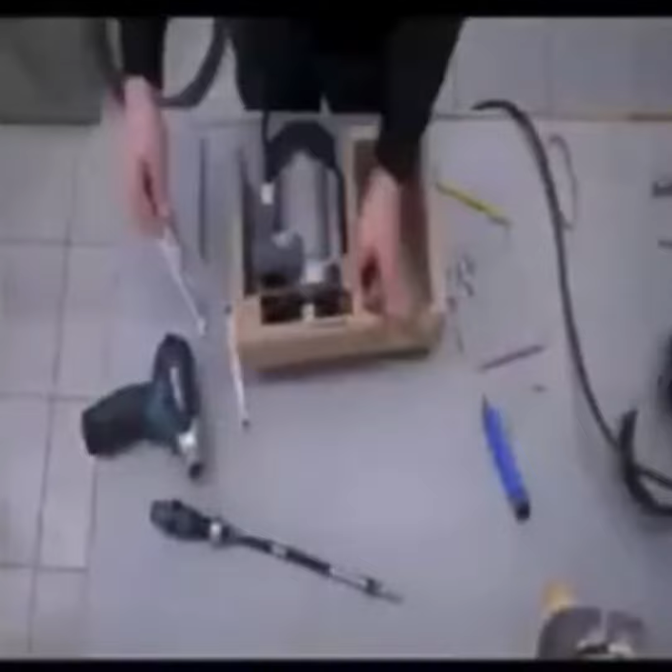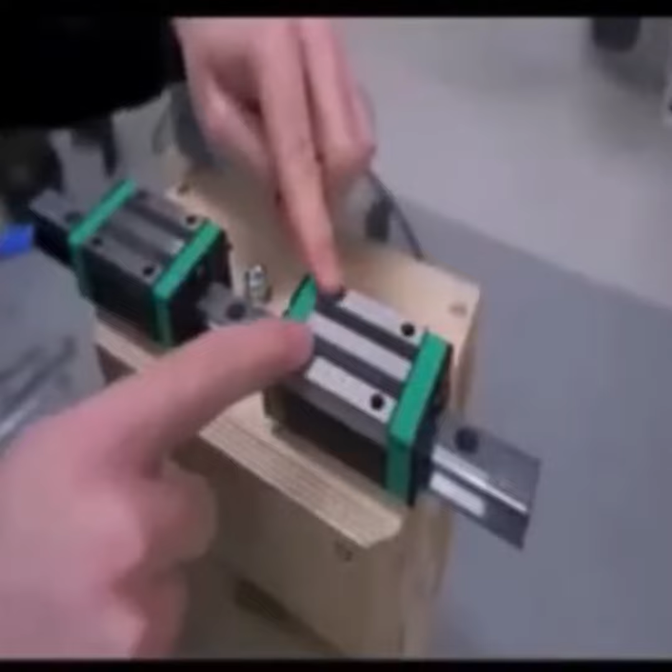Very nice so far. Now I will remove everything again, because moving forward it's easier when there are less parts and weight. For the sliding hardware I'll be using a linear rail with 2 blocks, because this set is, with just about $40, pretty unbeatable. The blocks have 2 precise surfaces, one where it gets mounted and one here that runs parallel to the rail. And to get them aligned on my sled, I've machined 2 holes for pins where I can slide them against. Mounting them to wood is